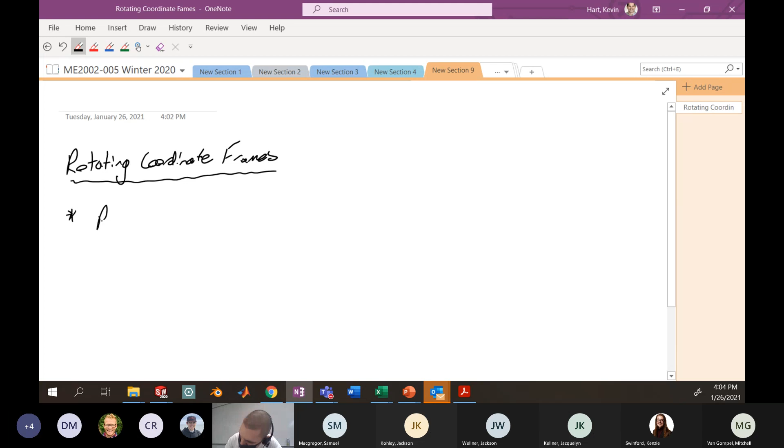And so we're kind of continuing our curvilinear motion conversation. Motion not in one dimension, so along a curve in either 2D or 3D. And let's recall quickly that the velocity of a particle as it's moving is tangent to the path. So that's important here. Okay, and we know that from conversations of our curvilinear motion from last week.

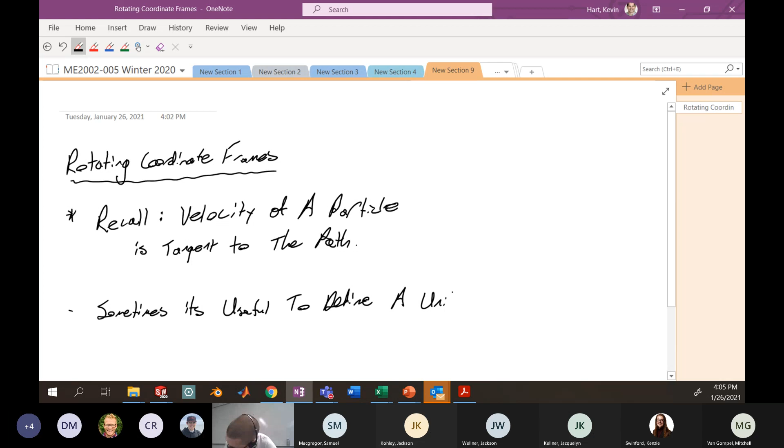So because velocity tends to be tangent to the path, we might consider a situation where we're not defining a fixed coordinate system in space like you typically do, but instead, maybe we define a coordinate system that has one of its axes in the direction of the velocity at all times. So let's define a coordinate system where one of the axes is in the direction of the velocity always. So sometimes it's useful to define a coordinate system, or let's say a unit vector, which constantly points in the direction of the velocity along the tangent to the path.

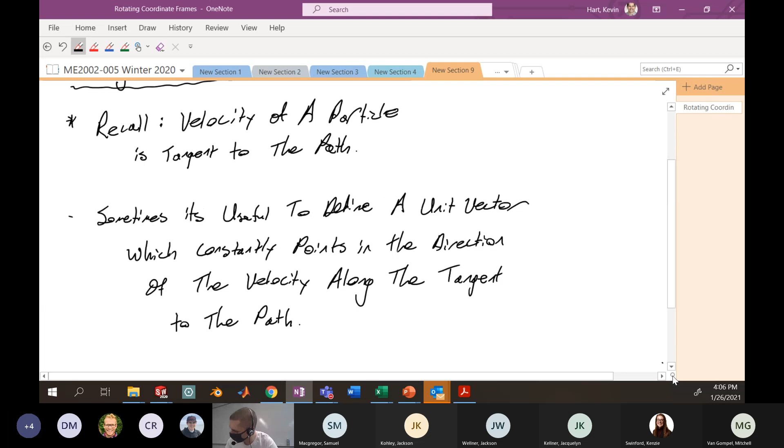All right, so we're going to call this the tangential unit vector, and we're going to denote it with a little bit of weird language, but it's going to get an E hat T. Call this the tangential unit vector, for obvious reasons, because it's tangent to the path, clearly. And we denote it as E hat T as such. All right.

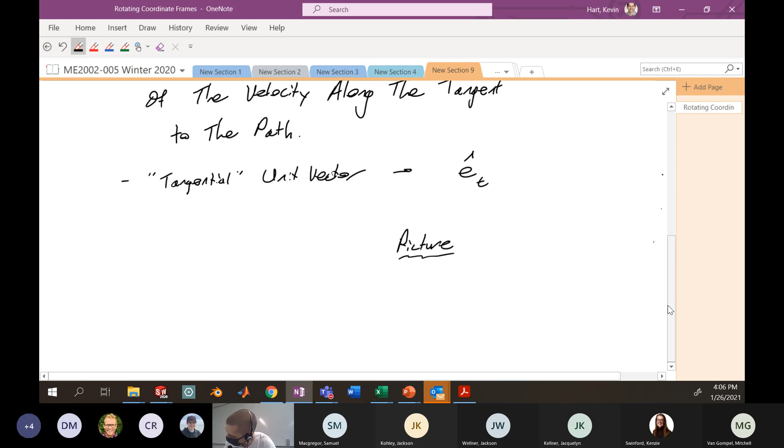So if we want to consider a picture of this, here you might have your traditional coordinate system. It's like X, Y, and we'll say that this is fixed in space. Maybe we give this a Z also for completeness. Here's your origin O, and again we have some particle that's moving along some curved path. This is the path of our particle, and here we are at point P.

Everything we've done so far, we've located this particle in space using our traditional position vector, which is like this guy here, this R bar. And we know in our fixed coordinate system that the derivative of that position vector with respect to time will give us velocity, and that the velocity will generally be tangent to that path. So we know we're going to have a velocity vector, something like this, which we know is dr/dt.

Now, with our new definition of our unit vector E hat t, we could also simply write this as the magnitude of the velocity, whatever it is, in this new unit vector direction E hat t. So we're now going to say that there's this unit vector that exists.

I'm going to draw it up here. It's generally in this direction. A unit vector, remember, has magnitude of 1, pointed in a certain direction. So it's basically a vector of magnitude 1 that helps you define a particular direction. You're used to probably I hat, j hat, k hat. Obviously those are vectors of magnitude 1 that point in x, y, and z. But here now we're defining a unit vector that points in the direction of velocity.

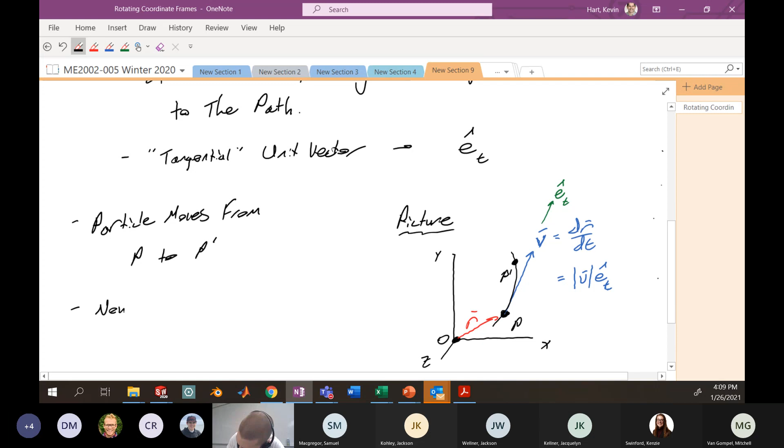So let's move this, and we're going to move to P prime. And let's say after some time later, we have a new unit vector that points in the direction that P prime is moving, and we're going to call that E hat T prime. So here my velocity has changed now. Let's call this V prime. And I have a new unit vector which points in this general direction, which is E hat T prime.

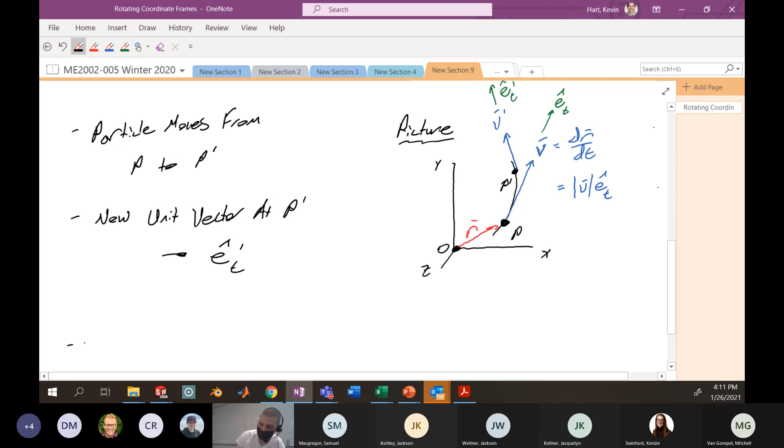Okay, so now I want to know how is that unit vector changing with respect to time? Because I'm concerned about how my velocity is changing with respect to time, I want to know how that unit vector is changing with respect to time. And now, because this unit vector is riding along the particle and changing its position as it moves through space, the time derivative of this particular unit vector is not going to be equal to 0. The time derivative will now have some importance. So now, time and space derivatives associated with E hat t are not 0, and we must discuss.

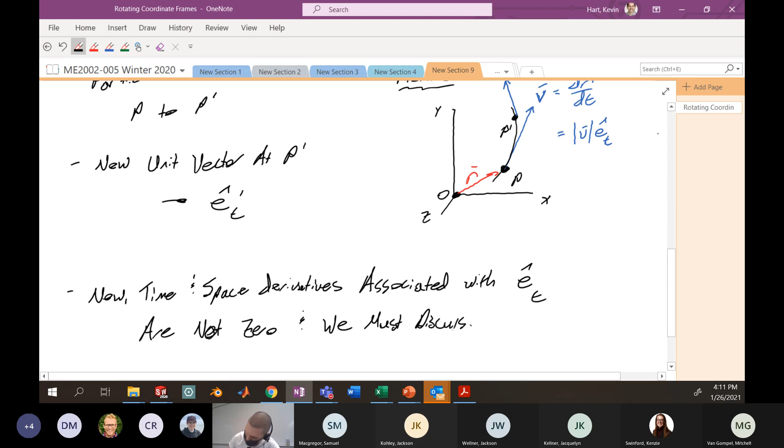Okay, so let's dive in on this math a little bit more. Let's first talk about a positional derivative of this unit vector, and then we'll use that as a proxy with the chain rule to get us the time derivative of this unit vector. A little strange, but just follow me on this. So here let's talk about the angular derivative of a unit vector, and specifically the unit vector here, E hat t.

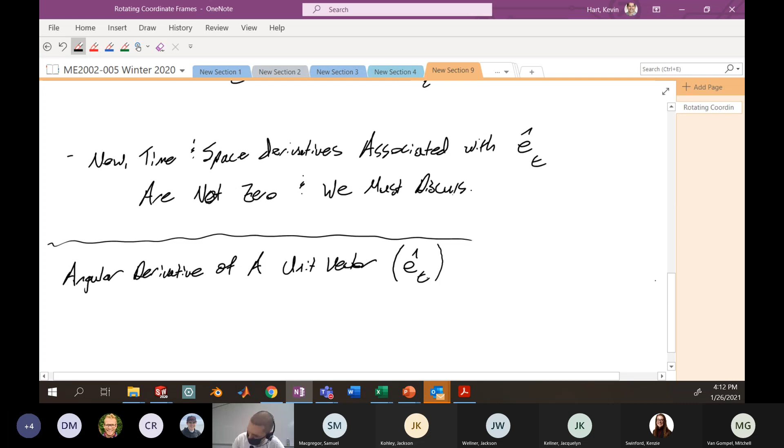Okay, so let's consider the situation we just had, where we had this unit vector that was changing from, maybe this general direction when I'm at point P, to sometime later this general direction when I'm at P prime. All right, so let's draw E hat t and E hat t prime emanating from the same point.

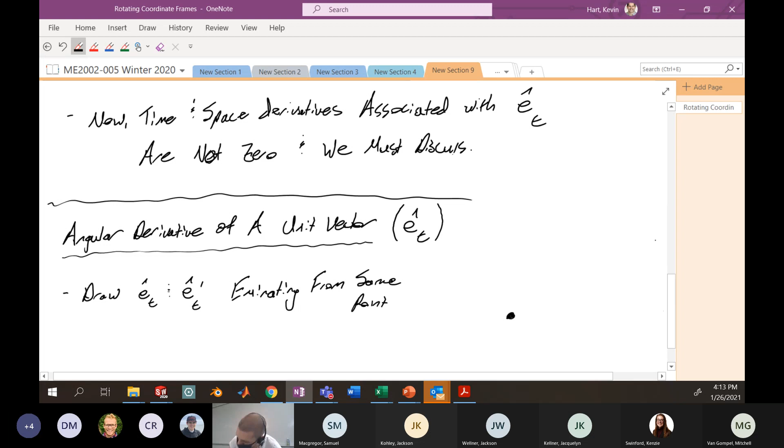Okay, so here we are. And we have E hat t — that would be like the direction of the velocity of P. And sometime later, this guy is rotating and changing to another location or another position. Here we call E hat t prime. All right, I know the magnitudes of these vectors are what value?

Rhymes with fun. 1. Okay, good. All right. And there's an angular distance between them, sort of how they're changing, which I'm going to call for now delta theta.

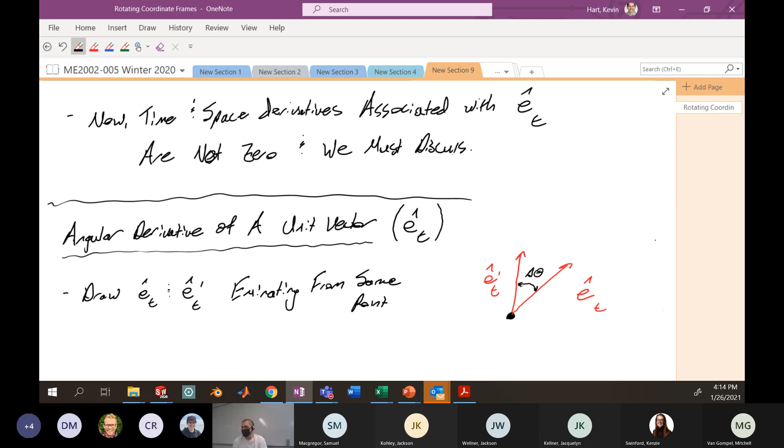Okay, my question is, what is the change of this general position vector as it moves from point P to P prime, as a function of position, as a function of rotation? Okay, so let's be clear about this.

Vectors have magnitude of 1, and the angle between is delta theta. That's the amount that my angle has changed as I'm riding on this particle from location 1 to location 2.

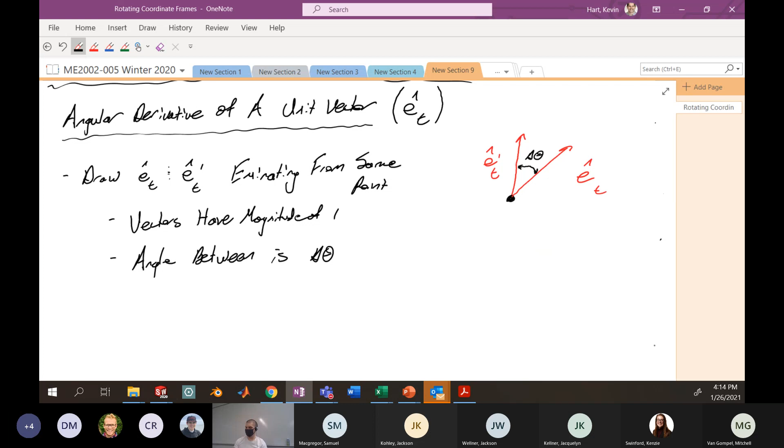Okay, so my question is, all right, what is the change of this unit vector? So what I want to know is, as I'm going from E hat t to E hat t prime, what is this vector here? The change in E hat t as I'm moving from location 1 to location 2.

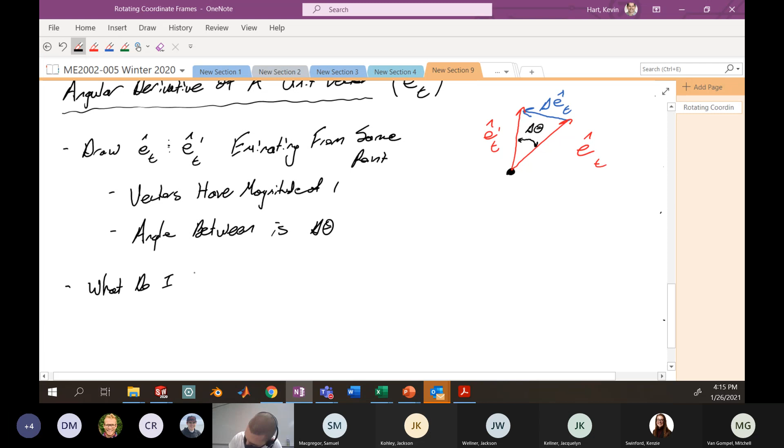What can I sort of determine about this particular vector? Well, let's start with this generally being a triangular shape. I know that the length of this is equal to 1, the length of this is equal to 1, and I know the angle between them is this delta theta.

So if you remember back to your geometry class, if you have a triangle and the side lengths of 2 edges of that triangle and the angle between, you can get the length of the opposite side using law of cosines.

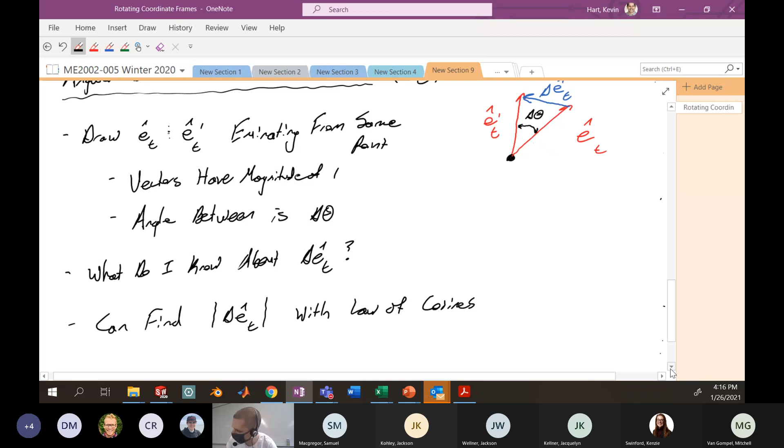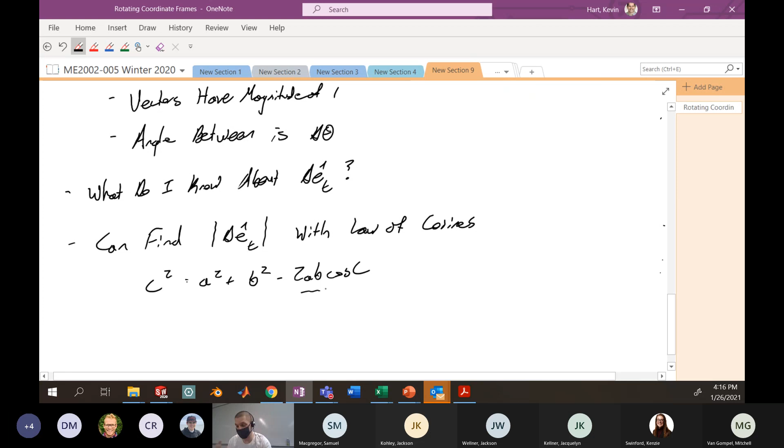Sorry, it should be delta E hat t. So you can work that if you remember your law of cosines. It's very similar to Pythagorean theorem. Maybe you remember that, maybe you don't. But you could work your way through this where A is 1, B is 1, because these are the side lengths of this particular triangle. Your angle C here is delta theta.

You could come up with a situation after some simplification, and actually some trig identities here, that the magnitude delta E hat t is 2 times the sine of the half angle, delta theta on 2. You want to work that as an exercise, that's cool. If you're going to exercise this, you'll want that — it may be useful on your next homework.

Okay, so now we have the magnitude of this particular vector, and what the heck is this? 2 sine delta theta on 2.

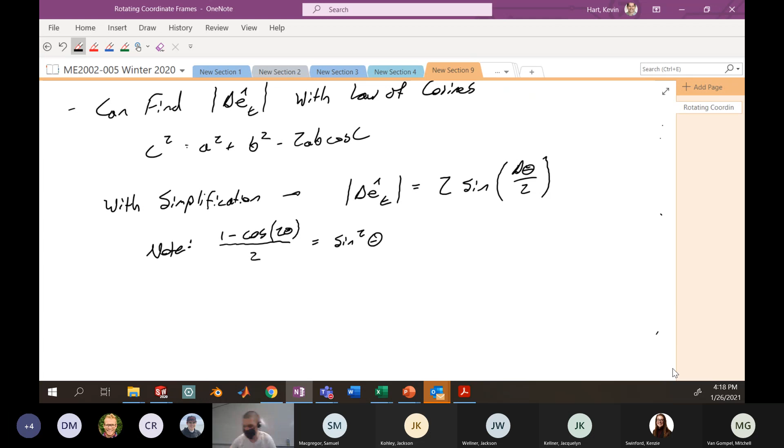Well, let's keep moving. We know that it makes that motion from this delta E hat t to this delta E hat t prime by moving through that angle delta theta. So let's normalize by that and see what happens.

On this angle that we sweep through here will be 2 times the sine delta theta on 2, divided by delta theta, right?

Why is this particularly powerful? Because this is starting to look a lot like a positional derivative, right? The change in a particular unit vector over the change in some angle. This is like the derivative of the unit vector with respect to the angular position theta.

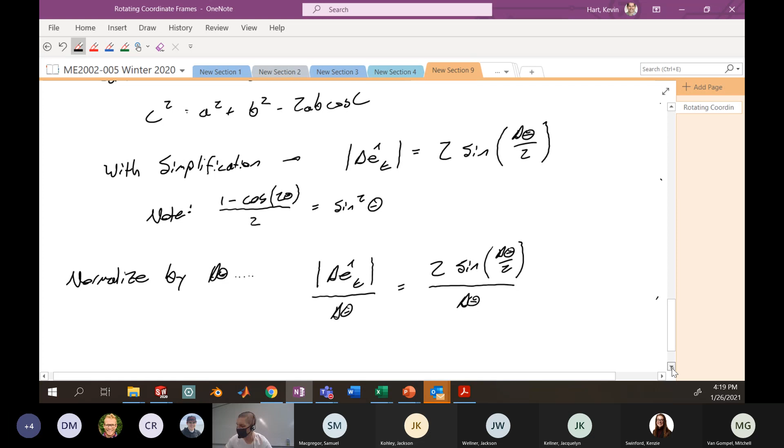That's what we're trying to get. This is going to help us to get the derivative of the unit vector with respect to time through the chain rule in just a second. Okay, you can rearrange this by moving the 2 to the bottom.

Looks something like that. And now the idea here is, again, this looks a lot like the derivative of a unit vector with respect to an angle. So in differential, take the limit as the change in the angle becomes very small.

I want to know if I have a very small change in my angle, what happens to this vector that we've created that moves from E hat t to E hat t prime? Take limit as delta theta goes to 0.

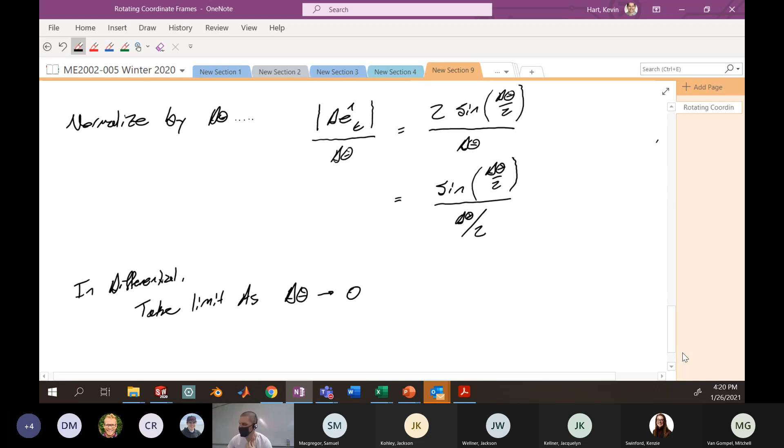So here, this becomes the derivative E hat t with respect to the angular position theta. Here, this is the limit as this angular position goes to 0 of this whole expression.

Anyone happen to know this derivative or this limit? What's the limit of sine x on x as x approaches 0?

Bam, she knows it. Elise, crushing it like a grape. She took it to school today because she's at school.

Okay, this is like the derivative or the limit of sine x on x. So think about this: limit as x goes to 0 of sine x on x, right? This is more or less exactly what you're looking at, okay? Because you could think of this as the limit as delta theta on 2 goes to 0. Same darned thing, okay? So the limit as x goes to 0 of sine x on x.

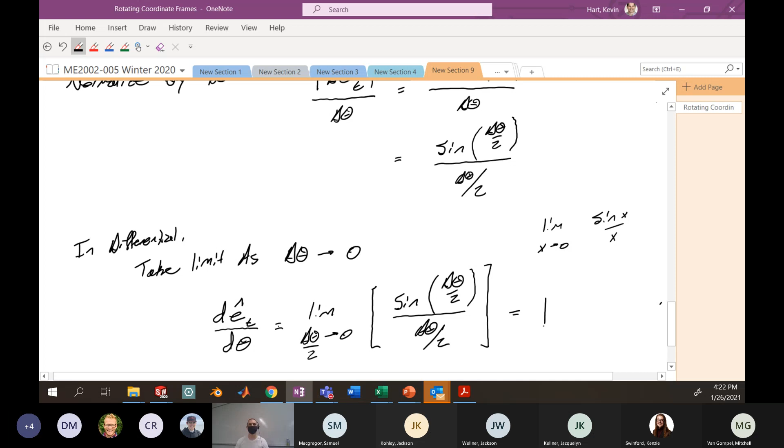Unlike in Mean Girls where the limit does not exist, this limit does exist, and it equals 1. Anyone get that reference? The limit does not exist. The limit does not exist.

Interesting. So what we end up with is that this particular derivative here, I guess this should be a sort of a magnitude here, because we have to make sure that this is a magnitude.

This is a little bit more mathematically correct. Okay, it's equal to 1. So what does that mean? All right, well...

If we take the angular derivative of this particular unit vector as that angular motion is approaching 0, we have a vector that is created of magnitude 1. A little bit strange to think about, okay?

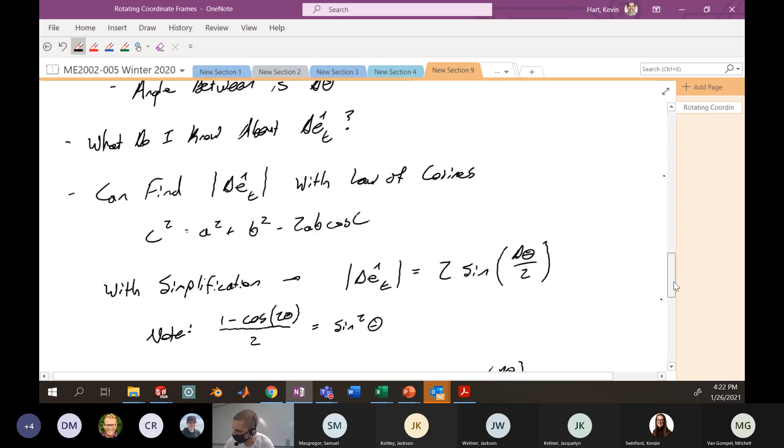So what we saw with our math is that we go back up to this triangle here. As this angle delta theta goes to 0, the magnitude of this particular guy, normalized by this amount, goes to 1. Wouldn't be intuitive by sort of thinking about that, but that is the case, right?

So, one other thing we need to know. Also, as this angle goes to 0, the angle between e hat t and delta e hat t goes to 90 degrees. And this is sort of obvious to see. If you think about two vectors that are... Okay, so what I'm talking about is sort of this angle here.

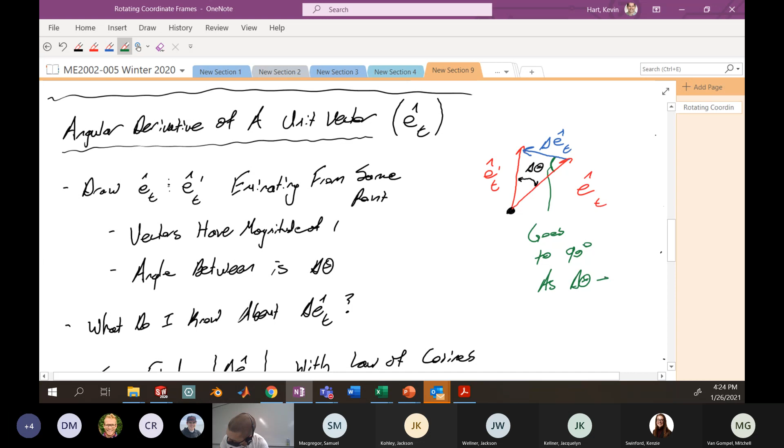Yes? Okay, so as e hat t and e hat t prime are closing in on each other, imagine them very, very, very close to each other, then the angle between e hat t and delta e hat t would be perpendicular, 90 degrees, as they approach each other. All right.

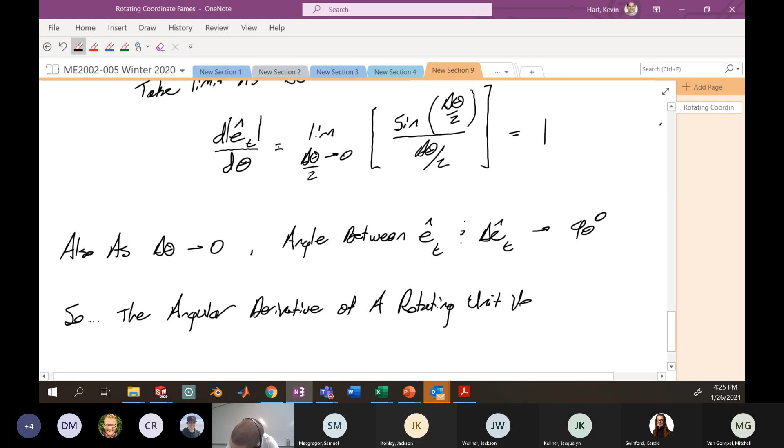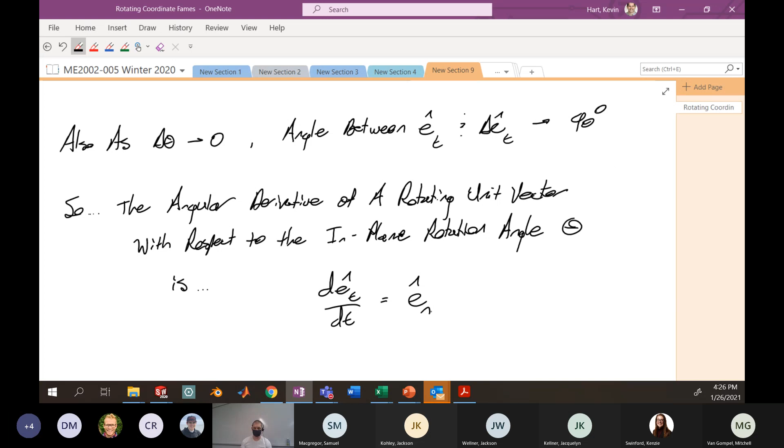So let's now give some definition to this delta e hat t, okay? So the angular derivative of a rotating unit vector with respect to the rotation angle theta, let's say in plane rotation angle, is a unit vector of magnitude 1, which we proved, which is 90 degrees from the original unit vector. Which is itself a new unit vector, a vector of magnitude 1, 90 degrees from the original vector.

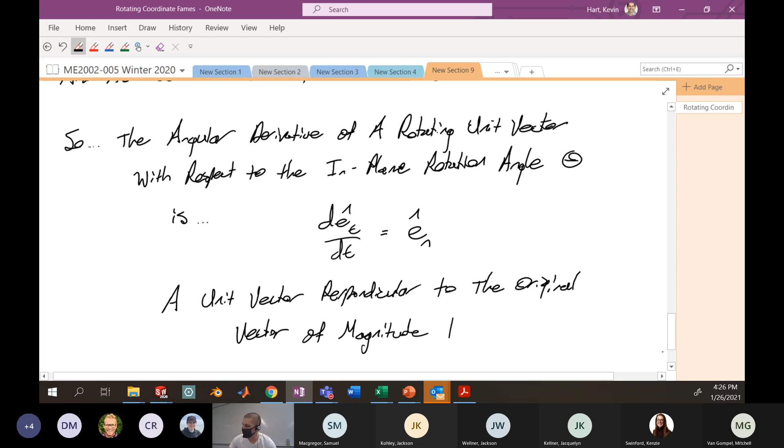We call this normal unit vector. This is 90 degrees from E hat t, pointed towards the center of curvature. Since I'm curving in a particular direction, it's important to define that this normal direction is pointing towards the center of curvature. So I'm taking this vector, I'm moving it here. My angular rotation is generally this direction, so my unit vector is going to end up pointing in that direction as well. This is towards the center of curvature.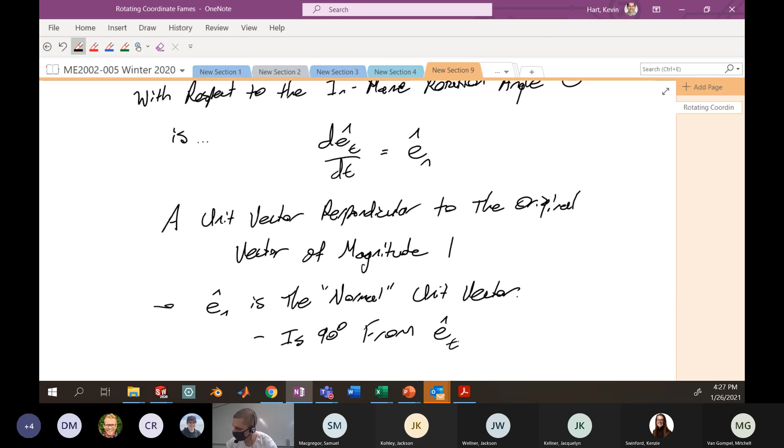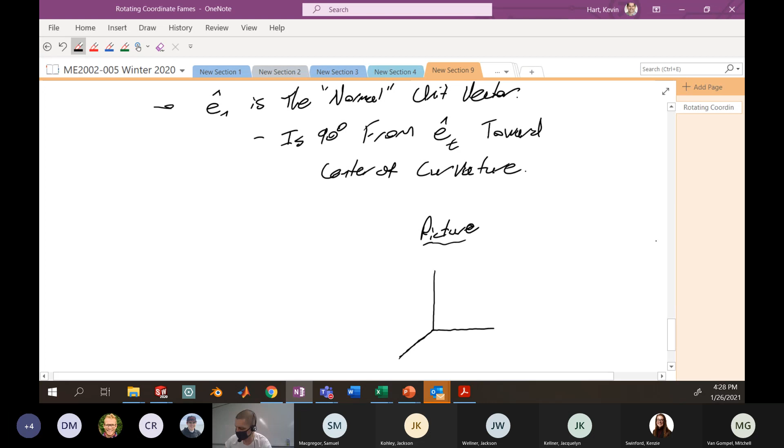Okay, what does this actually look like sort of pictorially? So here's your traditional XYZ. We're moving in space on our curve here. Here's my particle, P. My position vector that locates that particle. And the velocity of that guy.

So overlaying right on top of that velocity is the tangential unit vector here. And 90 degrees from that, pointed towards the center of curvature, is the normal unit vector here, E hat n. Oh, that's not 90 degrees. Come on. It's a little better. Where we note...

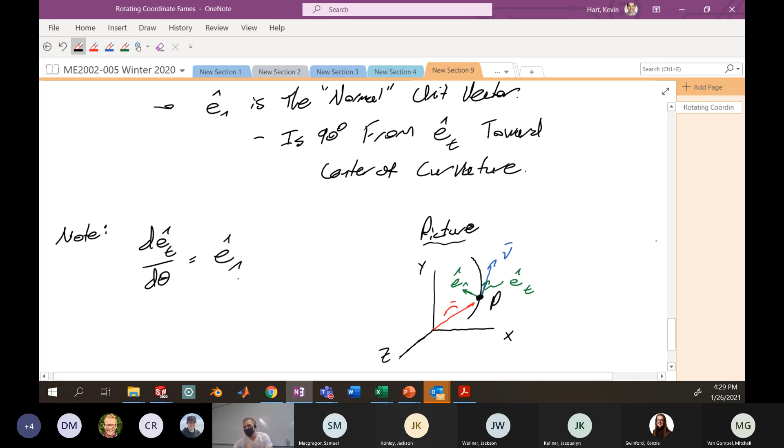Another interesting tidbit. Who's got this one? The derivative of the normal with respect to theta - where does that point? Is that just the negative original velocity? Excellent, so I got it in my ear. This is going to be negative the original direction, which I think he means E hat t, which is correct.

So some interesting properties with these derivatives that are like riding on the particle. All right.

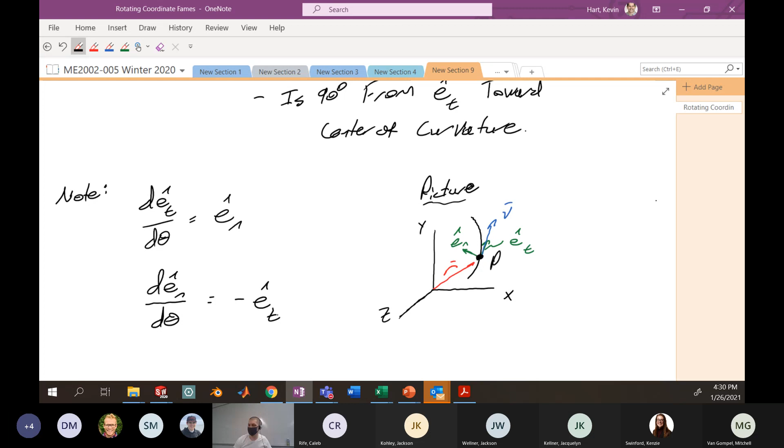So more information on normal and tangential vectors. Normal and tangential unit vectors. Okay, so a little bit more information on these guys here.

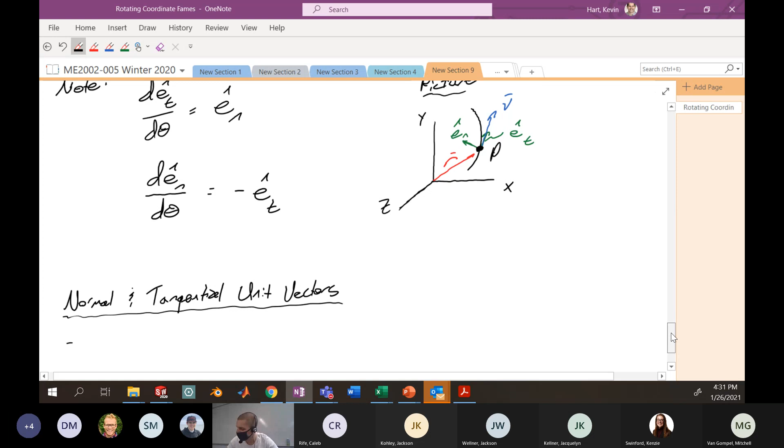These guys are a set of basis vectors in 2D, meaning since they're at 90 degrees with each other, they can sort of take the place of I and J if you're working in a two-dimensional problem, right? So you guys talk about basis vectors? Probably not until you get to like vector math, right? Like a senior level vector math. Yeah, okay, I'll use the proper language anyways.

Unit vectors. E hat t and E hat n form a basis in 2D. This is similar to I and j, right? If you've got a vector that's in space, you could define it in terms of I and j components if you have that coordinate system. But also if you had some alternate coordinate system, you could also fully define that vector in terms of E hat t and E hat n.

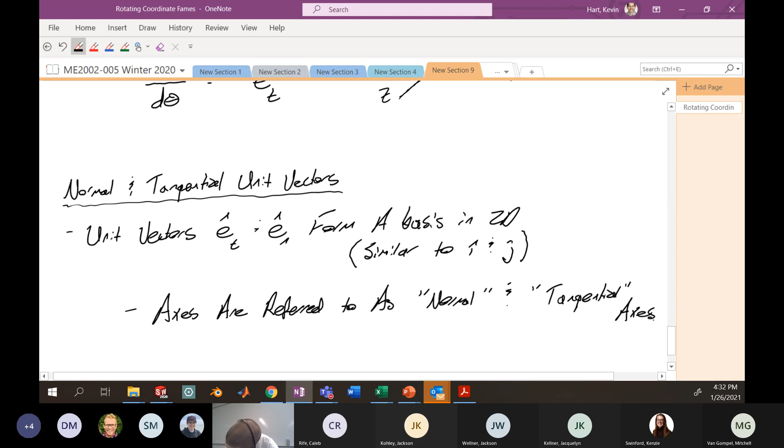Right? Okay, their axes are referred to as normal and tangential axes. Obviously. Like I said, it's similar to I and j, but they ride on the particle.

With E hat t, always in direction of velocity. Meaning that in this coordinate system, you can always define your velocity vector in this way.

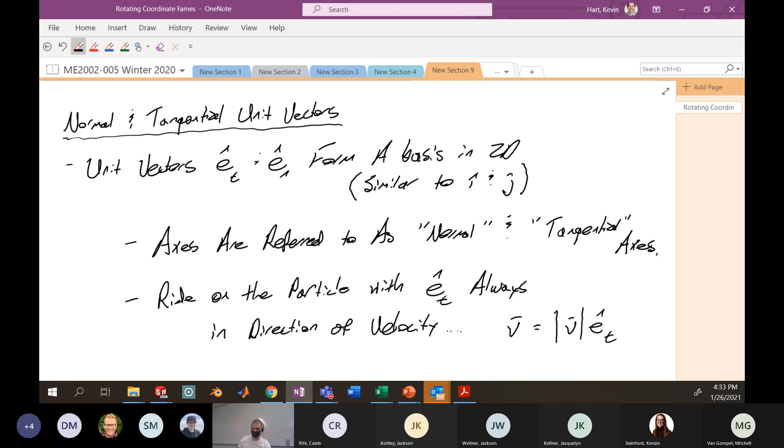So what do you do about the third direction? Well, the third direction, we're just going to define using sort of the right-hand rule. So in 3D, you need another unit vector.

We call this the binormal unit vector, E hat b. The direction of E hat b is out of the plane containing E hat t and E hat n, using the right-hand rule starting with E hat t, crossing to E hat n, to give us E hat b. So this binormal unit vector is given by E hat t crossed with E hat n, with right-hand rules applicable.

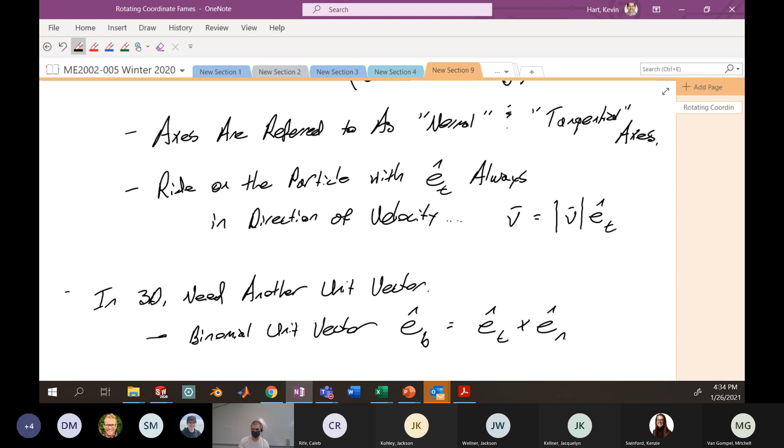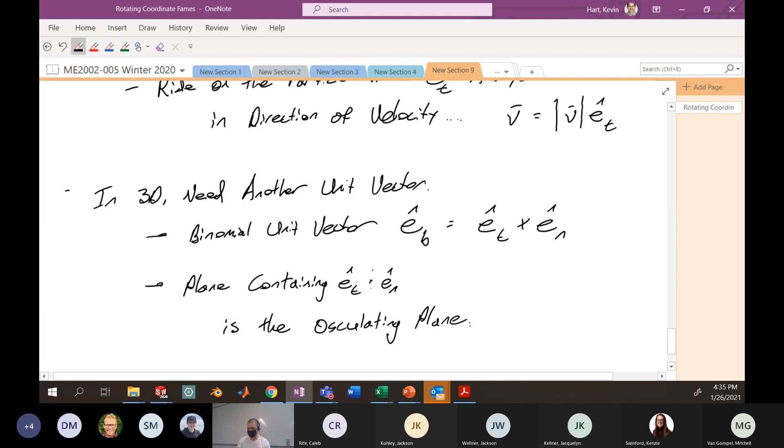Okay, last couple things. The plane containing E hat t and E hat n is called the osculating plane. And E hat b is always perpendicular to the osculating plane.

So what are we doing here? We're defining for ourselves a new coordinate system, basically. And unlike your traditional XYZ coordinate system, this one is no longer just fixed in space, it's moving on your particle. This is useful for a number of reasons we're going to see shortly, but for now you need to understand that the derivatives of the unit vectors associated with this new rotating coordinate system are not zero.

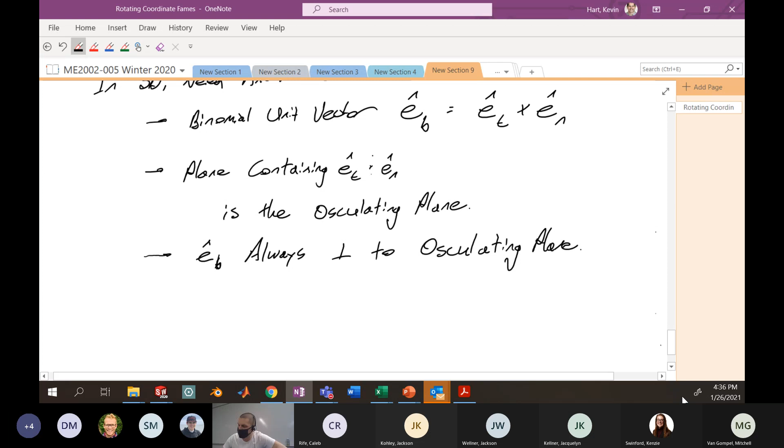Let's consider the full picture of everything that's happening here, and give it a three-dimensional view if we can. Here we go with XYZ again, doesn't really matter how it's defined. I think I might have defined it a different way before, but the point is the same. Let's say we have some wonky three-dimensional path that this thing's going on now, not just contained in a particular plane. Do the best you can to imagine that this is a three-dimensional path. I know it's hard to draw a three-dimensional path on a 2D piece of paper, but let's just go with it.

At any particular location, you could think about where the particle is, what the tangent to the path is at that location, and where the center of curvature might be. If the particle is right here, and we're moving this way along the path, then the velocity is in this direction - here's your E hat t at that location. Pointing to the center of curvature, here would be E hat n, which looks like it's pointing inwards. And if I think about E hat t crossed with E hat n, my thumb would stick backwards. If this is the plane containing E hat t and E hat n, then the binormal sticks out of that plane in the backwards direction.

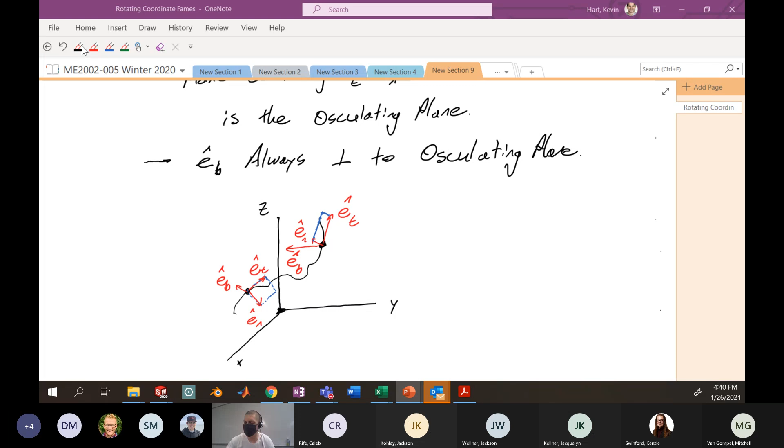All right, so those are some nice sketches, as best as I can do with my Pictionary skills. So that's great that we have a nice new coordinate system. Now let's talk about kinematic relationships with this guy finally.

All right, velocity is here. Yes. How do we get the acceleration if we have the velocity? If you have velocity, you want acceleration with respect to time. We've talked about the angular derivative, which is a positional derivative.

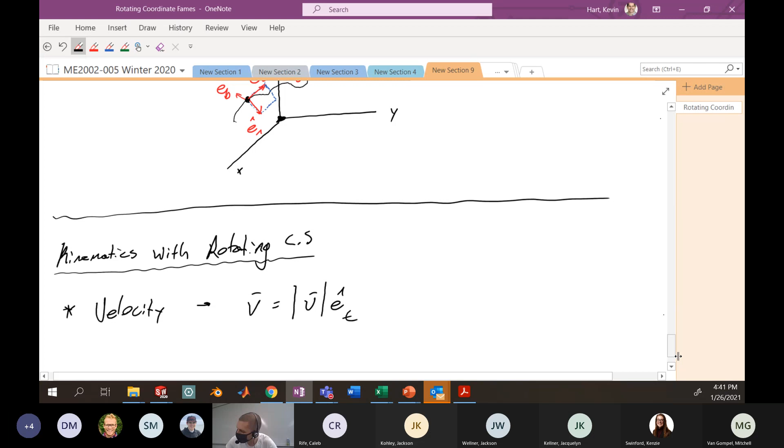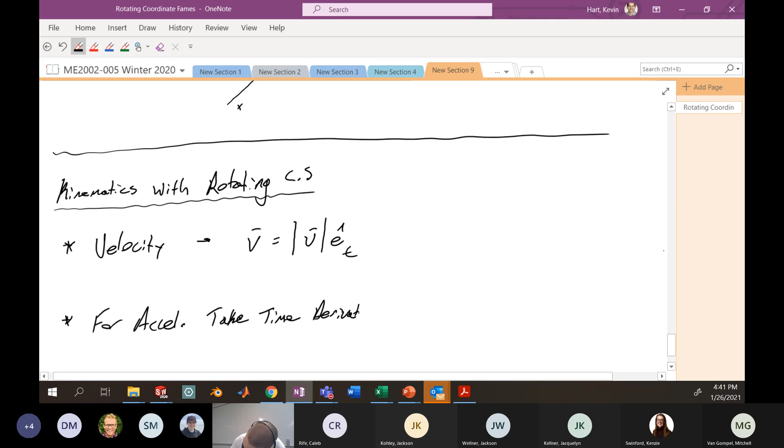All right, so for acceleration, take the time derivative. So here we have the acceleration is dv dt. Well, we can expand this with our new definition of the velocity: it's the magnitude of the velocity along E hat t. It's time for chain rule, boy.

So here, this is like u and v. So u dv plus v du. We are going to have the derivative of the first times the second, plus the derivative of the second times the first. So here we have the derivative of the magnitude of the velocity, dt, along e hat t—the derivative of the first times the second, plus the first times the derivative of the second.

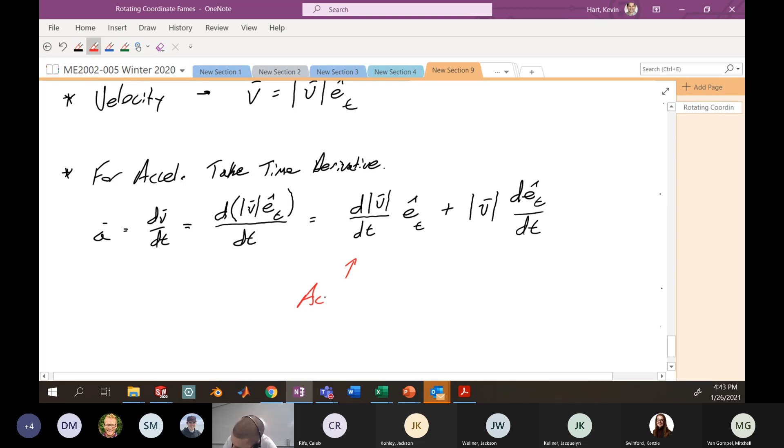So we might identify some of these terms. This here, the derivative of the magnitude of the velocity with respect to time, particularly in this direction, is the acceleration of the particle in the tangential direction. You might see this as the acceleration in the tangent direction along e hat t, where that a_t there is a scalar—the acceleration in the tangential direction. Think of this like the scalar of the acceleration in the x direction along i hat when we do rectangular coordinates. This obviously is the magnitude of velocity.

This here is not 0, okay? This is the time derivative of the rotating unit vector. We've talked about the angular derivative—now let's talk about the time derivative. Remember when we did rectangular coordinates, we saw something like di hat dt, and every time we saw that we said it was 0, because if you have a unit vector fixed in space, the time derivative of that isn't changing at all with respect to time. But now you've got this tangential unit vector that's floating on this particle, pointing every which way, going crazy. That's definitely changing as a function of time. You can't just say that's going to be 0—you've got to deal with that.

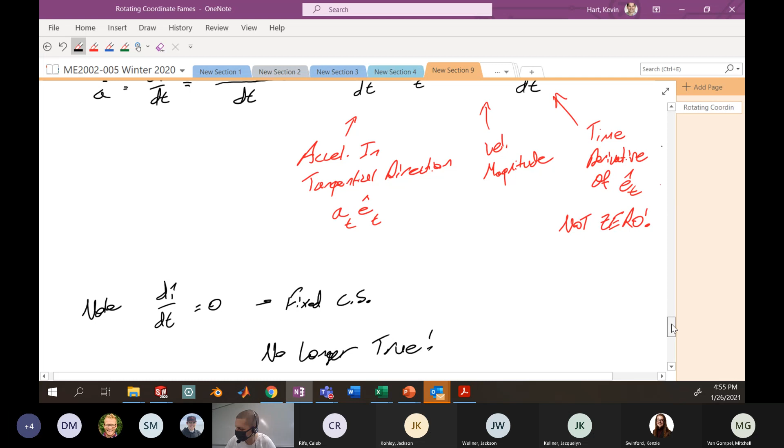All right, so we're interested in the time derivative of this tangential unit vector. Remember, this is a unit vector that points in the direction of the velocity. Now we want to talk about the time derivative of that particular guy. So let's get on with it. Time derivative.

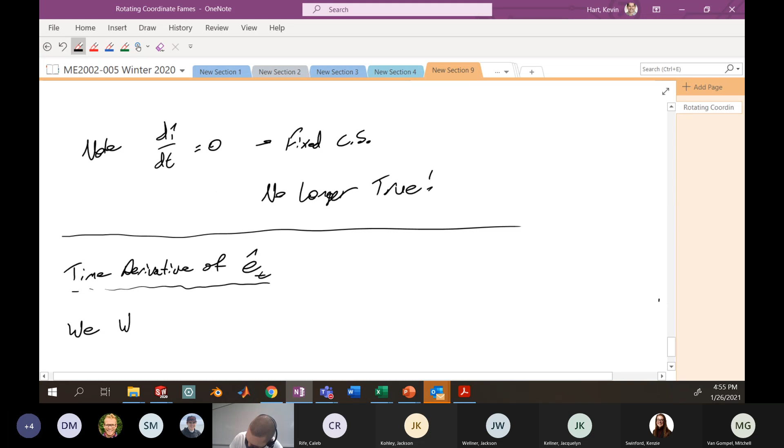Okay, so we want this dE hat t with respect to time for our acceleration expression.

How can we do this? I don't know, don't ask me. What do I know? Oh, okay. Well, dang it, I got to know. All right.

Now, this technique's a little tricky, but what we're going to do here is employ the chain rule, using a series of derivatives that we can physically understand to help us get to this final derivative. So let me show you what I mean.

We're going to employ it. We're going to employ it. We're going to pay it minimum wage and not give it healthcare. Okay, no—employ chain rule. You will get paid $7.25 an hour and like it. All right, employ the chain rule.

Where here we say that this particular derivative can be broken up into things that might be a little more physically understandable. The first being a piece of information we already have.

The angular derivative of this guy, which we know, which is... he's already given up, all right. E hat n. Good, thank you Miss Elise—she's always coming through for me today, making you guys look bad.

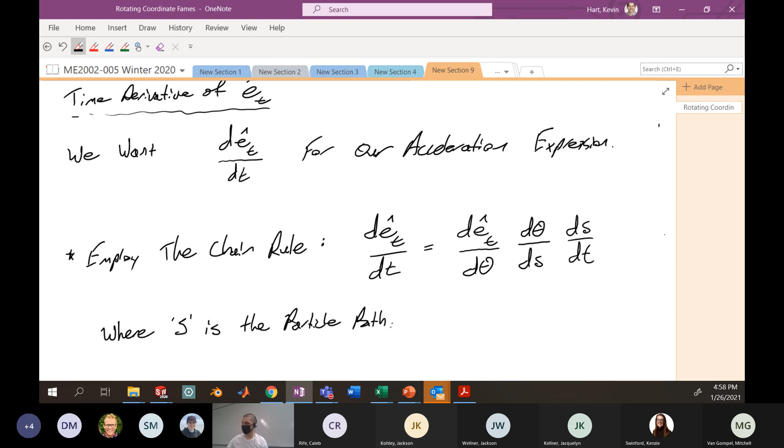So let's consider a picture—lots of pictures these days. Here we have your XY coordinate system, and let's say that our particle is moving along this path. All right, and it moves, like normal, from P to P prime.

As such, let's say that we're moving along a circular path, and this particular circular path has our center of curvature maybe up here. Let's call this C.

So moving from P to P prime along a circular path with center of curvature at point C. Okay, what does that mean?

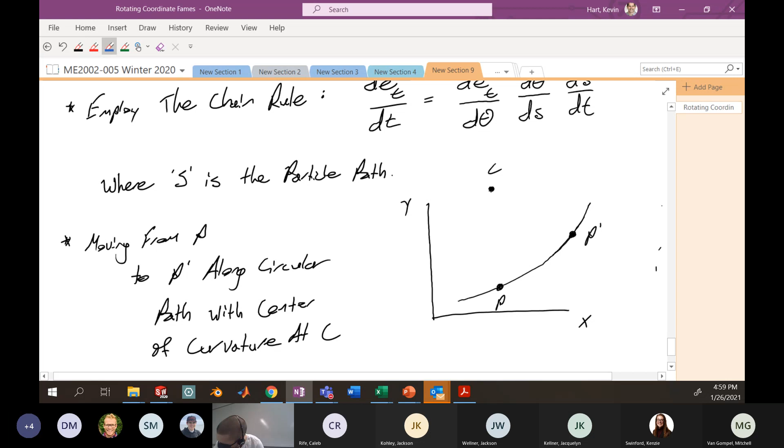Circular path, center of curvature at point C—that means that the distance between the center of curvature and these particular points is known and understood. Since this is the center of curvature, we typically denote that with a rho. Row your boat.

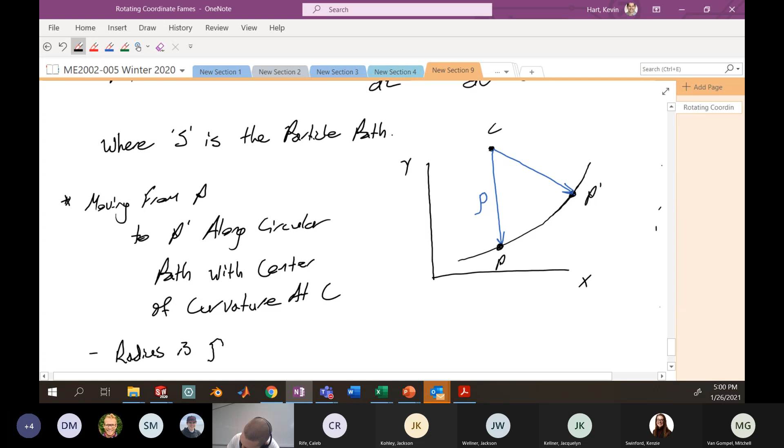Okay, so here path length—the radius here is rho, and the path length from P to P prime we'll say is delta S. So what I mean is this length here, this total arc length, is the arc length delta S.

This is different from the direct distance between P and P prime, which we talked about before in this class, earlier in this class. Let's also say the angle we sweep through is delta theta.

Okay. That generally is this angle here. Okay.

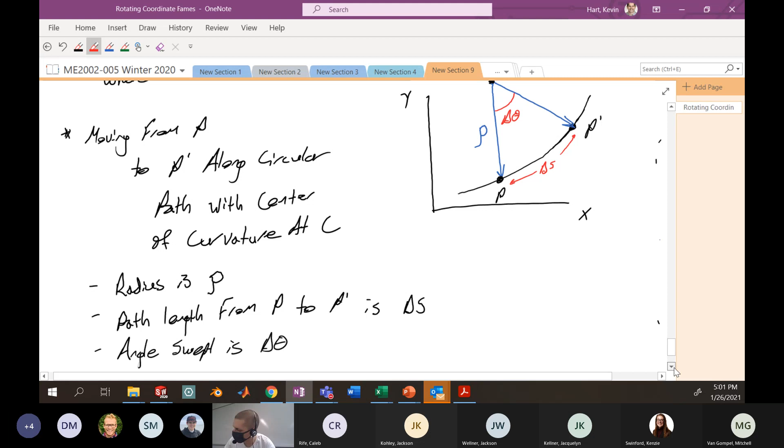With equations for the arc length of a circle, you can come up with a relationship between rho, delta theta, and delta S. That is, this total path length that you travel is the radius of curvature rho times delta theta.

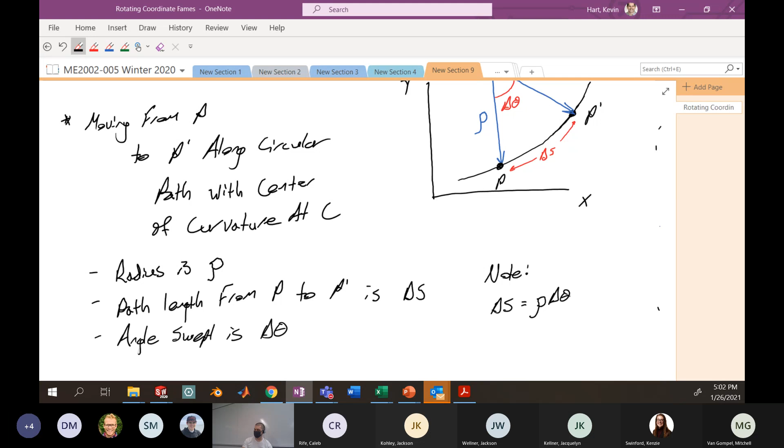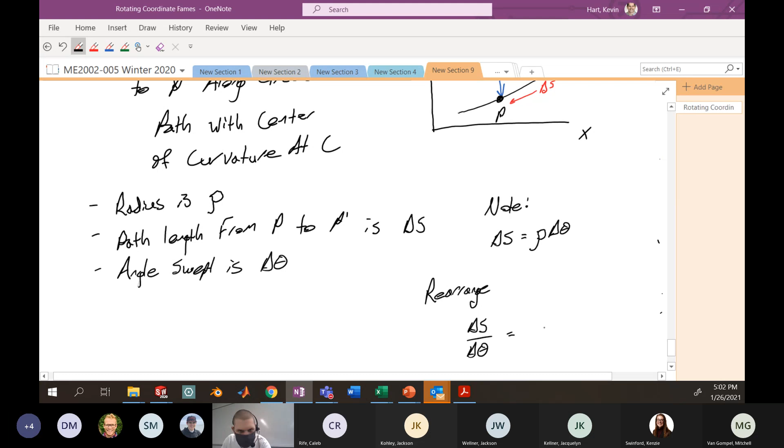All right, we want to take the limit of this as delta theta sort of goes to 0. So we're going to rearrange and say that in this particular situation, we have delta S on delta theta. Is this right? Yep. This is rho.

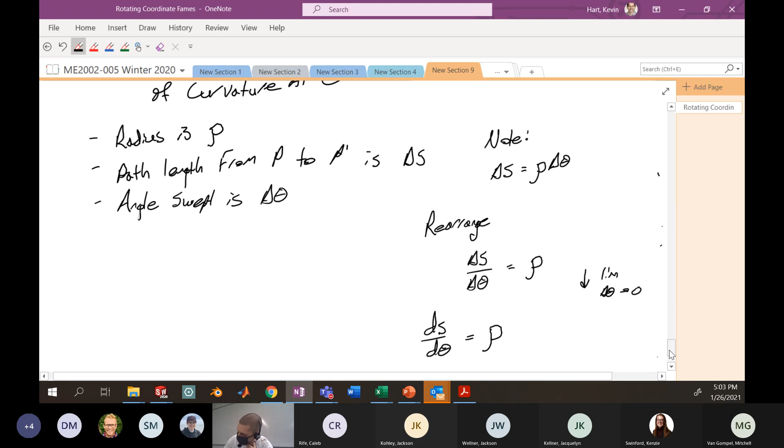So we'll take the limit here in the differential and say generally that ds/d theta is rho. Change in this position with a change in angle is rho. Or if we go back up and look, we actually want like the inverse of that: one on rho, where rho is the radius of curvature at that particular instant.

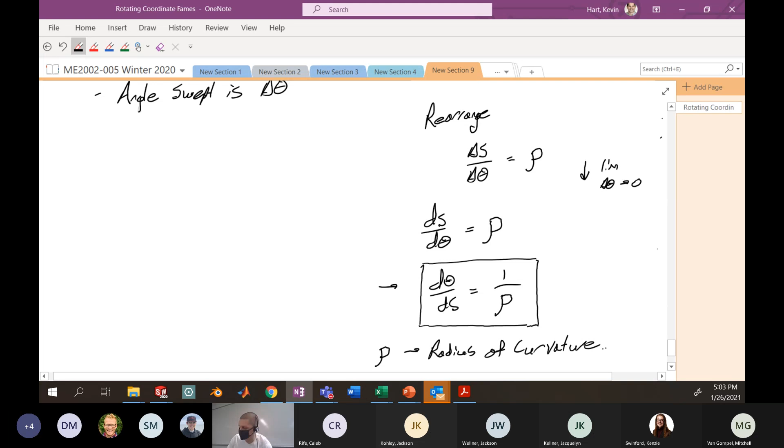Sort of the next bit in our equation here. Okay, last little thing we have to worry about is this here. That one's pretty straightforward.

The change in the total path over time. This here is the speed. We don't have any direction, this is the total change in the path over time. So as you know, you take this in the differential, how much are you changing your position, or how much are you changing your path over time? This is the magnitude of the velocity, which is the speed. So the differential change in path length over the differential time is the speed. It's like meters per second, basically.

So altogether, we have the derivative of our tangential unit vector with respect to time was something like the derivative of this guy with respect to the rotation angle theta, multiplied by the derivative with respect to position. The derivative of the angular rotation with respect to the change in the path length, multiplied by the change in path length with respect to time. All of these things now we know.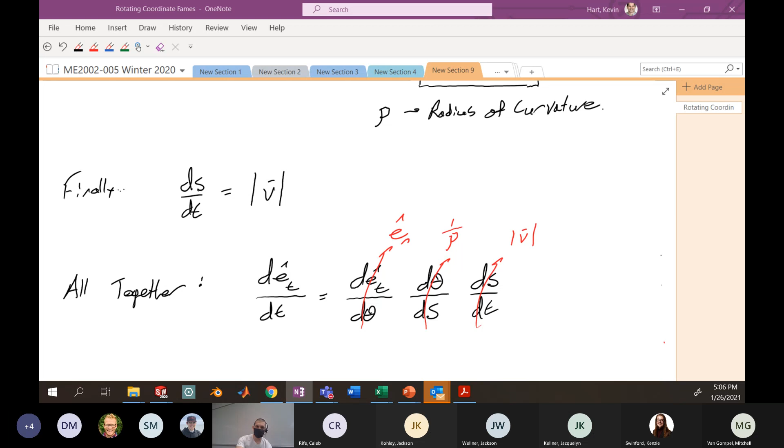Put it all together. This is the magnitude of the velocity divided by the radius of curvature at any particular time in the direction of the normal.

Interesting, interesting, interesting. Bet you probably wouldn't have guessed that. I wouldn't have. The derivative of the unit vector in the tangential direction with respect to time is the magnitude of the velocity normalized by the radius of curvature times the normal. What? How is that a thing? Okay. It just doesn't really make a lot of sense until you do the math and you're like, okay, I guess that's what it is.

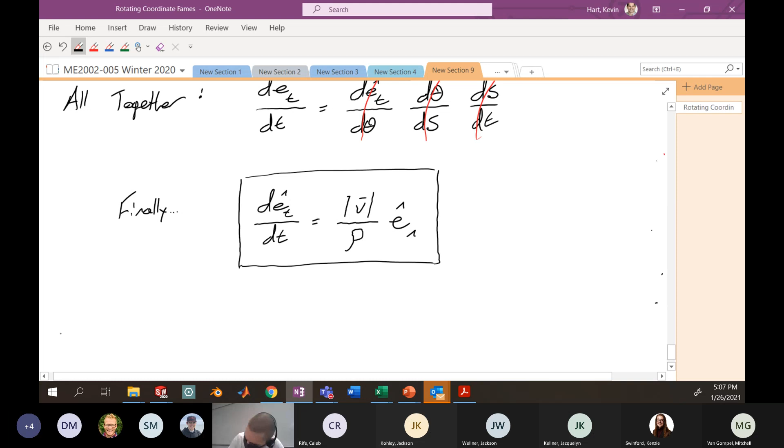All right, so back to acceleration then. Remember that we had acceleration is the derivative of the velocity with respect to time, which we wrote as the derivative of the magnitude of the velocity in E hat t. Or as we saw, this was this guy plus the first times the derivative of the second, which we now have an expression for.

So finally, this acceleration. We'll notice here that we have magnitude of the velocity as part of this expression. So we're going to end up with two of those magnitudes of the velocity normalized by rho and E hat n. So this is the magnitude of the velocity squared, normalized by the radius of curvature, all in the normal direction. Yeah, baby!

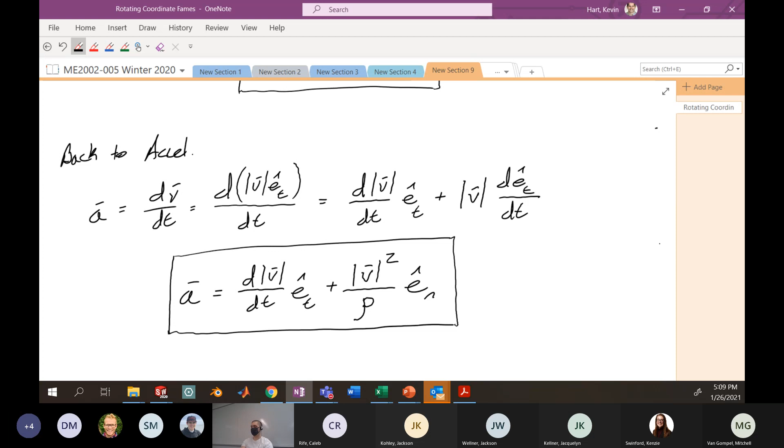There you go. You may see it written as this. Useful. Where obviously the tangential component of the acceleration is the change in the magnitude of the velocity with respect to time. And the normal component is the magnitude of the velocity squared, normalized by the radius of curvature at that particular instant on the curve, rho.

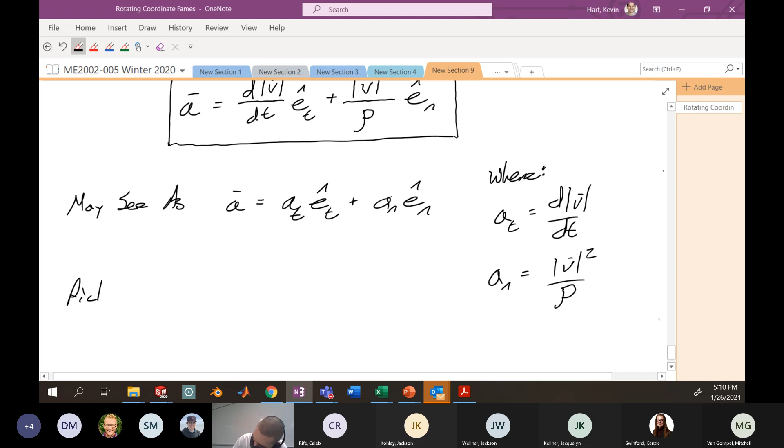I'm going to write it here, and I'll draw a picture. Typical coordinate system. That's nice. All right, here's our picture. Got our particle, bam.

I want to draw the acceleration components of this particular particle P. I can do that here. The acceleration in the tangential direction is given by AT. This has a magnitude, which is the change in the magnitude of the velocity normalized by time. This is specifically in E hat t.

And we also have our normal components of our acceleration, which point inwards towards the center of curvature. It's the magnitude of the velocity squared divided by rho.

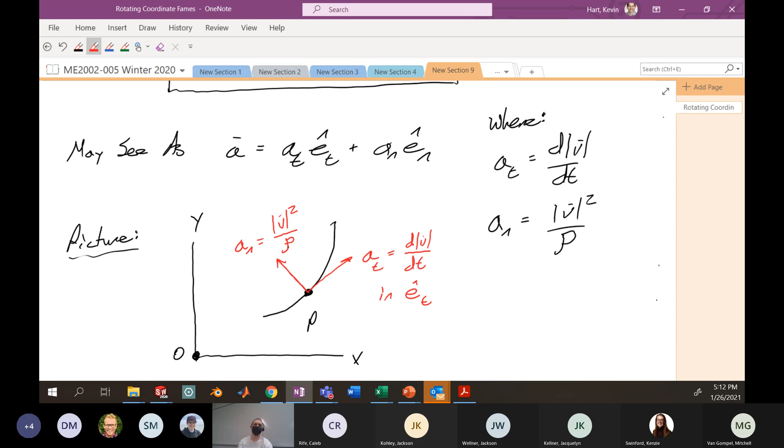This is useful because let's say you have a particle traveling on a circular path. Well, if you know kind of the velocity of that particle on the circular path, you can easily define some of these components, like what is my acceleration in the normal direction, what is my acceleration in the tangential direction at any particular time. You can also easily define the velocity, it's just the magnitude of the velocity in the direction of the particle, or all tangent to the path in E hat t. And that can allow you, in some situations, to easily define the position if you're, for instance, writing things in as a function of time. All right.

Now let's see an example problem where we actually use this stuff. So much talky, so much mathy. Let's do some realistic applications here.

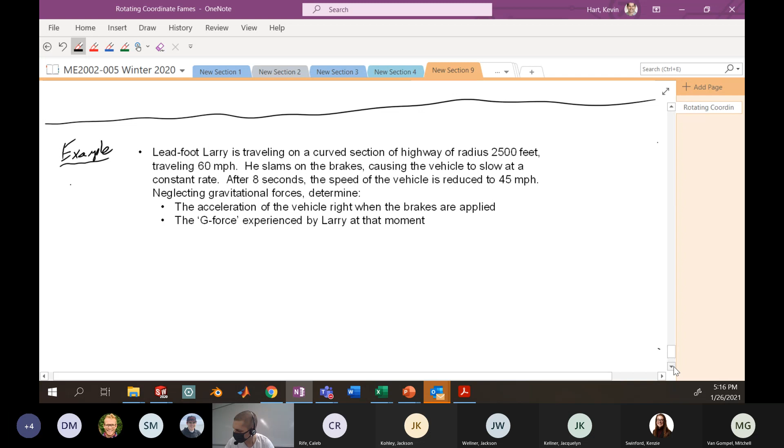Okay, let's tackle this bad boy. So what are we asking for? We want the acceleration of the vehicle right when the brakes are applied.

Okay, so I'm asking for an instantaneous acceleration right when he slams on the brakes. So yeah, he's slowing down over 8 seconds, from 60 to 45, but really what the problem is asking is how much he's really accelerating, or decelerating in this case, right when he slams on the brakes.

All right, so for this we want to use our equations, so we'll use n and t axes. And that means we need to define them, or draw them on our particular guy at this moment. So let's do that.

So here's our Leadfoot Larry, and he has some velocity in this particular direction, 60 miles an hour. And we know, if we know the direction of the velocity, we know the direction of E hat t. So away we go. So here is E hat t, just drawn in the direction of velocity, nothing to it.

Now my normal unit vector points 90 degrees from E hat t towards the center of curvature, so that would be here. So we've got a coordinate system for this problem now, which is nice, and it's riding along the car in this situation.

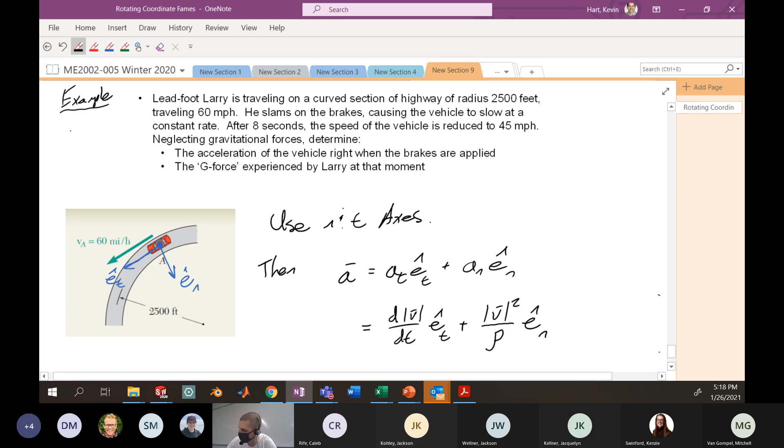Then our acceleration with our equation that we just saw is a equals at times e hat t plus an times e hat n, or written out fully, this is the change in velocity over time in the tangential direction, plus the magnitude of the velocity squared over my radius of curvature in the normal direction. Looking at this problem and thinking about each of these individual terms, I think it's pretty straightforward at this point. Once you have this powerful tool that describes the accelerations in these e hat t and e hat n directions, it can be very simple to solve these.

So here, the change in velocity over time is constant. We're told that in the problem - it's a constant rate. Slams on the brakes, causing the vehicle to slow at a constant rate. It's part of the problem.

And I know that I have 60 miles per hour when I start, and 8 seconds later, 45 miles an hour. So this dv/dt is simply the change in velocity, 60 minus 45 miles per hour, normalized by the time. So to be clear about the setup, this is velocity 1 minus velocity 2, divided by time 1 minus time 2, which is 0 minus 8 seconds.

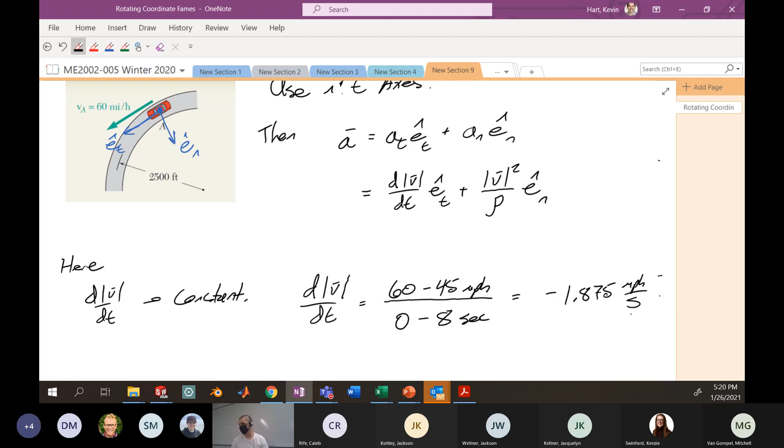So this is a change of 15 miles an hour over negative 8 seconds, so you're slowing by 15 miles an hour over 8 seconds. If you do the decimal here, that's negative 1.875 miles per hour change per second - a little bit of a disgusting unit. I think it's easy to wrap your head around if you've driven in a car before: how fast is your velocity decreasing every second? But when we're doing engineering problems, we want to convert.

And here we'll have, after converting to feet per second, negative 2.75 feet per second. How many feet in a mile?

Incorrect, yeah it should be squared. 5,280 feet in a mile. I think you got your numbers back there, he said 2,580. Okay, that's good, all right cool.

So here we have changing, slowing 2.75 feet per second squared. All right, so there we go. At the time when he first slams on the brakes is what we're interested in.

And at that particular snapshot, my velocity is going to be 60 miles an hour. So the magnitude of the velocity, right when he slams on the brakes, 60 miles per hour, which we can convert as 88 feet per second. And we also know our radius of curvature at our track. This is sort of a circular track, or the snapshot of the radius of curvature of this particular curve at this time, 2,500 feet.

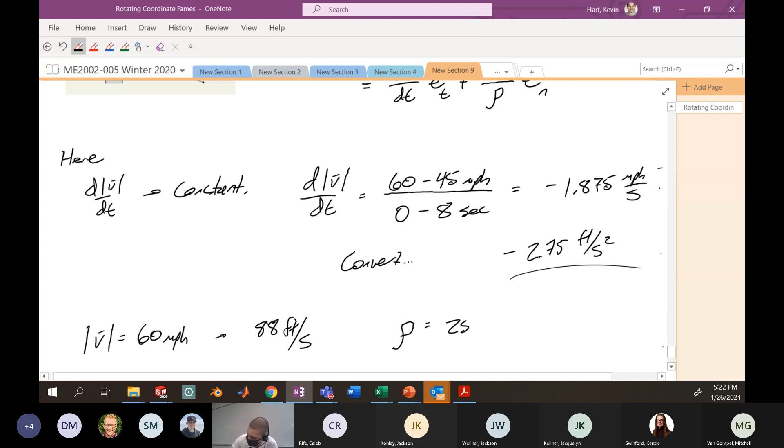Okay, so finally, after all said and done, my acceleration, I'm ready to go. I have everything. Here is negative 2.75 feet per second squared in the direction of travel.

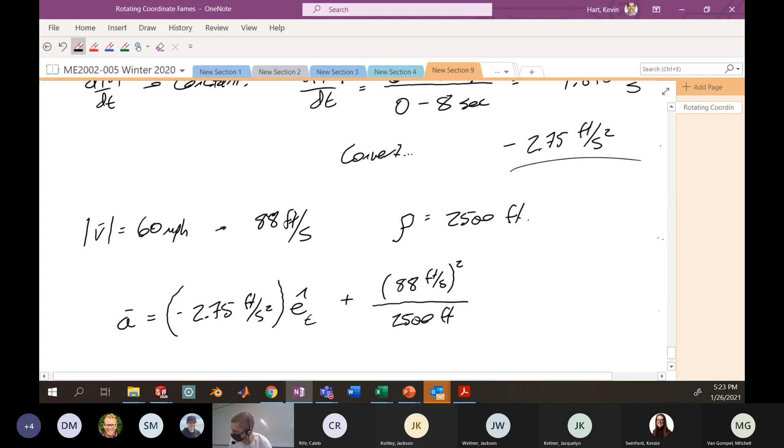So this is just the magnitude of the velocity, derivative with respect to time. Adding to this, what is the velocity squared divided by the radius of curvature? So here this will be 88 feet per second squared, normalized by 2,500 feet in the normal direction.

So all said and done, negative 2.75 e hat t plus acceleration in the normal is 3.1 e hat n, units here feet per second squared. That's my full acceleration here.

All right, now I want the G-force experienced by my main man, lead foot Larry. G-force. For the uninitiated, G-force would refer to sort of how many gravitational forces he's experiencing, basically. What is the multiplicative acceleration relative to the acceleration of gravity?

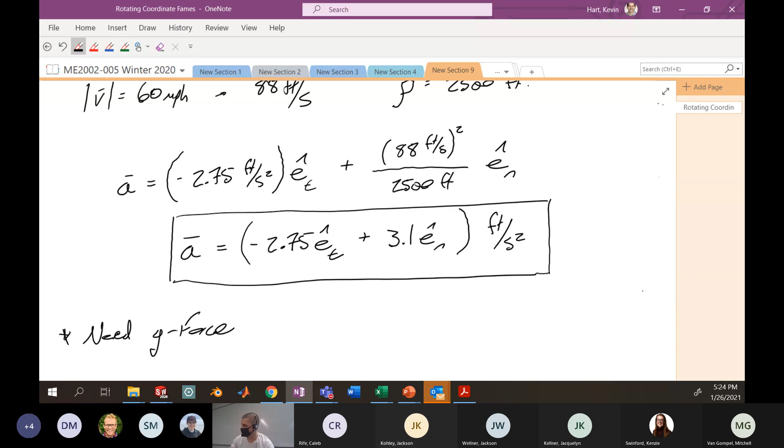Yes, that is correct. So what we're sort of looking for here, let's give it some symbol. Let's call it phi. This is our sort of G-force that we're experiencing. This would be the magnitude of the acceleration normalized by typical gravity, G. We call phi our G-force that he's experiencing.

What, you want a different symbol? Oh yeah, English units are dumb. I agree, I got to do it. They forced me, they strong-arm me. We literally have discussions about this at the department meetings. People are like, I don't want to teach English units, they're dumb. How can you argue that it makes total sense that 5,280 feet are in a mile, and that you need to know that? Complete sense. Except for my sarcasm is glowing here. Metric units, so dumb. All right, magnitude of the acceleration can be gotten square root of the sum of the squares. You're getting me on a soapbox here.

Acceleration of gravity in English units. So here we are, you can calculate that the magnitude of the acceleration in this situation is 4.14 feet per second squared. Normalized by my acceleration of gravity, and so we get the G-forces that he experienced, which we've given an arbitrary symbol here of phi, 0.129.